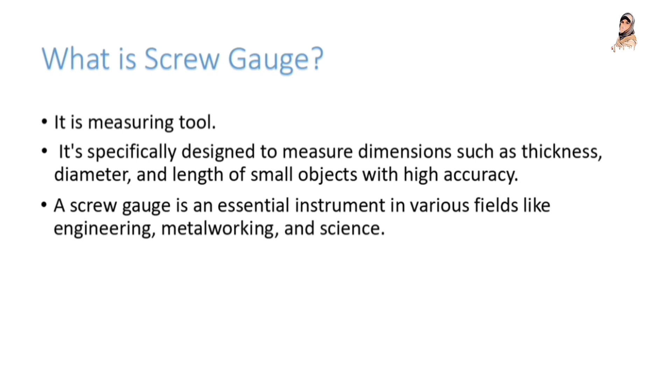In this video we will discuss the screw gauge. So let's start our video. What is a screw gauge? It is a measuring tool. It's specifically designed to measure dimensions such as thickness, diameter and length of small objects with high accuracy. A screw gauge is an essential instrument in various fields like engineering, metalworking and science.

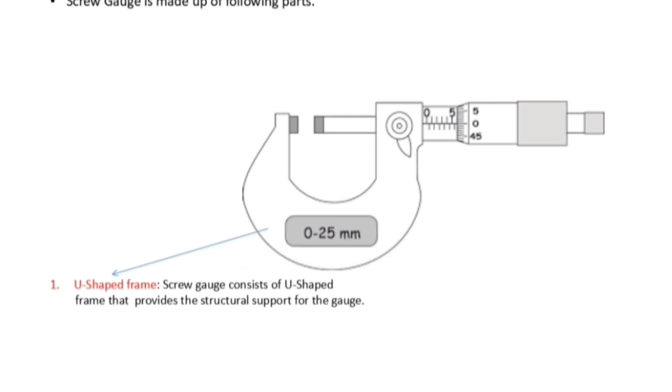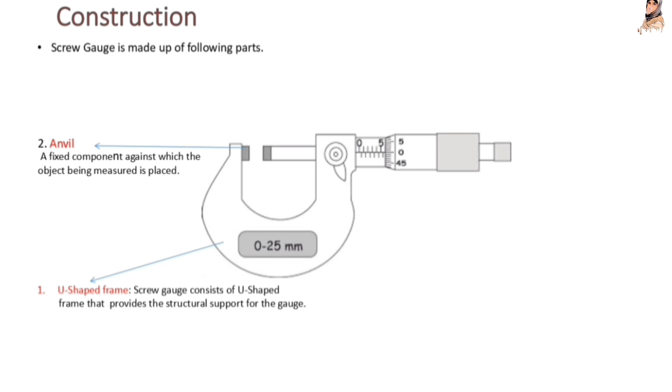What are the parts of a screw gauge? A screw gauge is made up of the following parts. The first part is the U-shaped frame. A screw gauge consists of a U-shaped frame that provides structural support for the gauge. The second part is the anvil, a fixed component against which the object being measured is placed. The third part is the spindle. It is a movable part. It makes contact with the object for measurement.

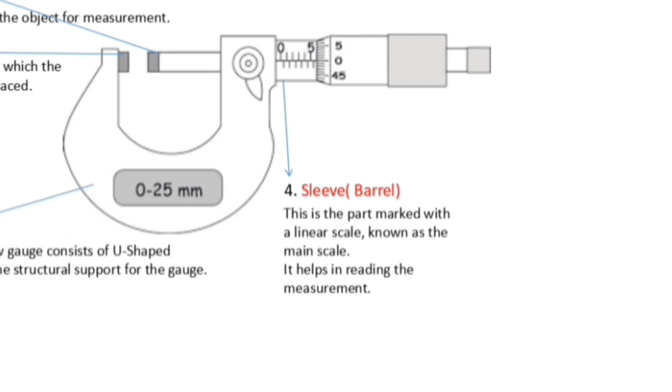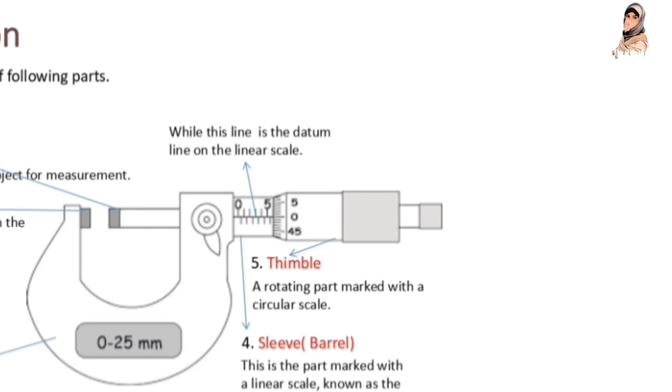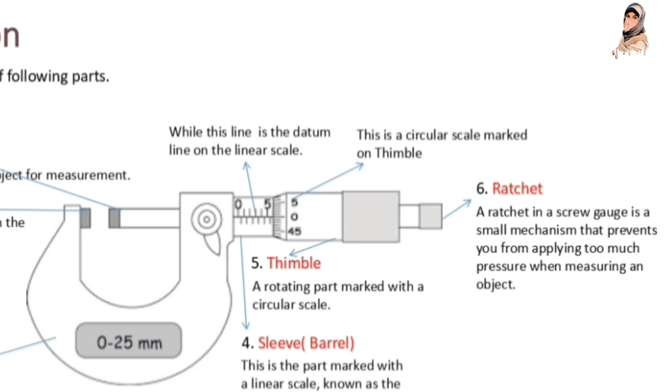The fourth part is the sleeve or barrel. This is the part marked with a linear scale known as the main scale. It helps in reading the measurement, while this line is the datum line on the linear scale. The fifth part is the thimble, a rotating part marked with a circular scale, while this is the circular scale marked on the thimble. The sixth part is the ratchet. A ratchet in a screw gauge is a small mechanism that prevents you from applying too much pressure when measuring an object.

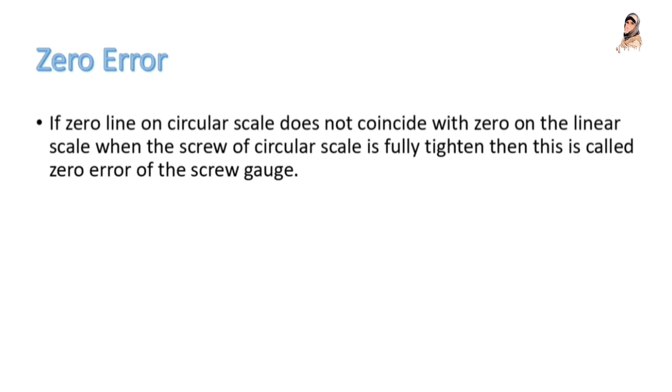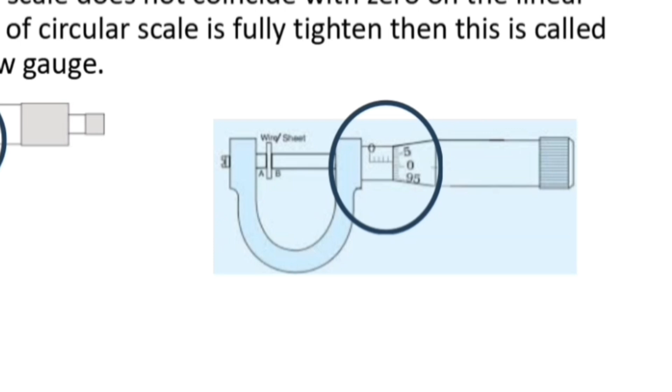Now, zero error of the screw gauge. If the zero line on the circular scale does not coincide with zero on the linear scale when the screw of the circular scale is fully tightened, then this is called the zero error of the screw gauge. As you can see, the zero on the circular scale and zero on the datum line coincide with each other, so there is no zero error. While in this case, the zero on the circular scale and zero on the linear scale do not coincide with each other, so this is a zero error.

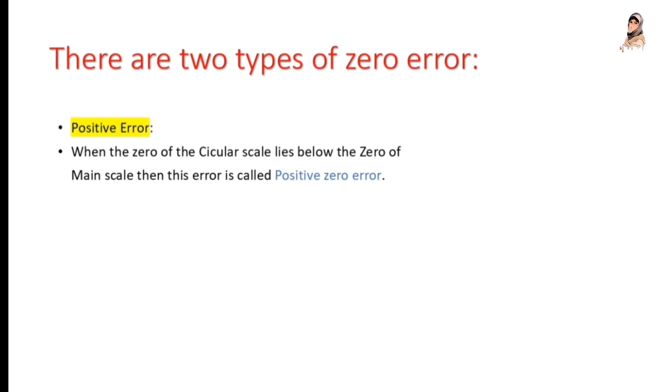There are two types of zero error. Positive zero error: when the zero of the circular scale lies below the zero of the main scale, then this error is called positive zero error. The second one is negative zero error. When the zero of the circular scale lies above the zero of the main scale, then this error is called negative zero error.

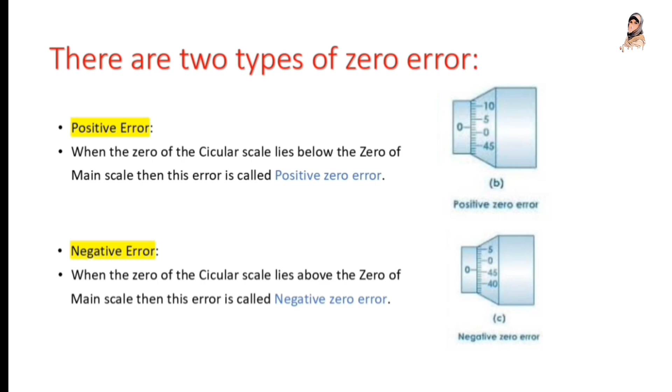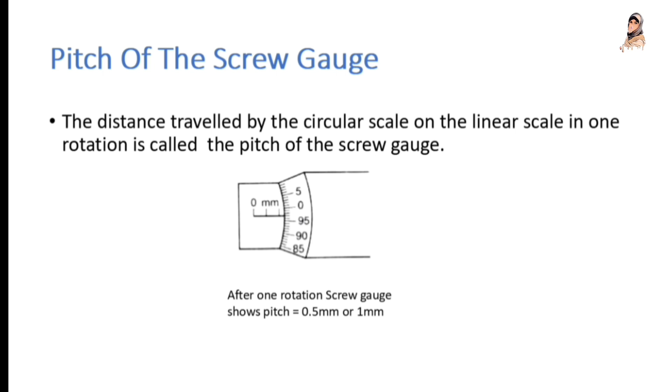What is the pitch of the screw gauge? The distance traveled by the circular scale on the linear scale in one rotation is called the pitch of the screw gauge. After one rotation, the screw gauge shows pitch is equal to 0.5 mm or 1 mm.

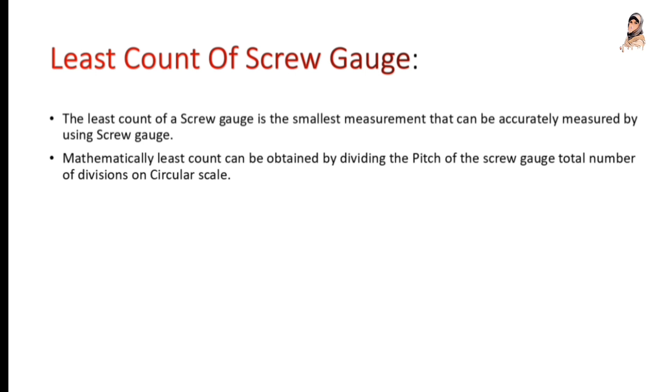Now, least count of the screw gauge. The least count of a screw gauge is the smallest measurement that can be accurately measured by using the screw gauge. Mathematically, least count can be obtained by dividing the pitch of the screw gauge by the total number of divisions on the circular scale. So, for example, if the pitch is 0.5 mm and there are 50 divisions on the thimble, then by dividing these two values, we get 0.01 mm or 0.001 cm.